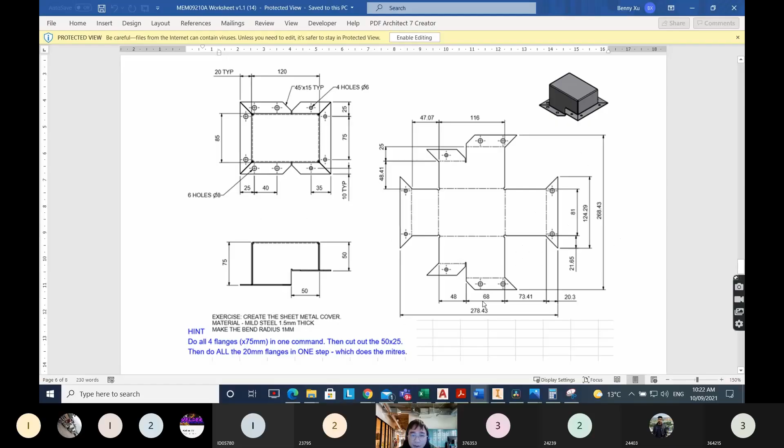Sheetmetal number 2, that's much easier, but there's some cutout in there. Go fold, fold, and fold. Yeah, this one is 2 folds. The first one is a 20 mil, so this is 20, and this one is a 10.

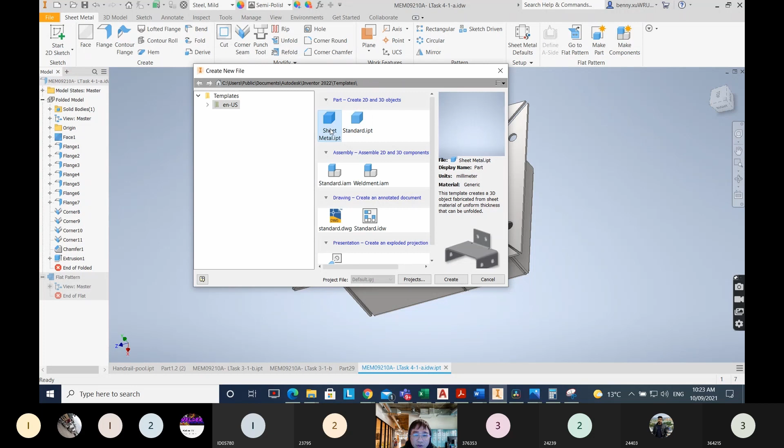The thickness is 1.5 aluminum. If I go to new, and then I go Sheetmetal and create. Remember, the first thing, change the default. Generic, I don't want it generic, I want it to be aluminum, 6061. Aluminum 6061. See that? And then this one, I just hit in the number 1.5 mil and save and close.

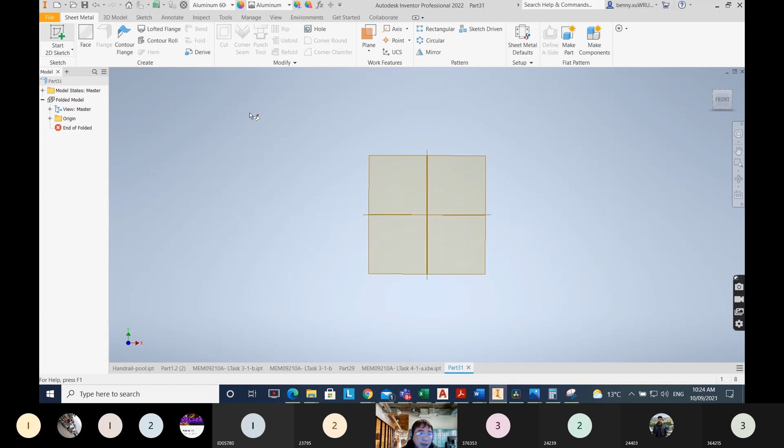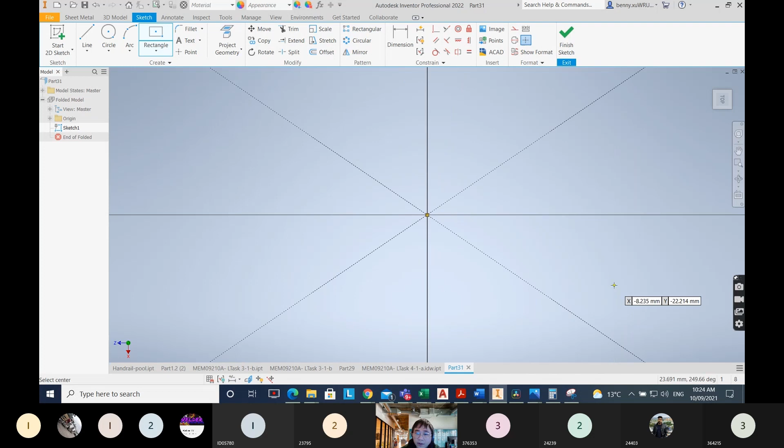Everything's been changed, and sketch. And again, I use this X and Z. Base size 300 and 200. If I go to the center, 200, tab 300. Okay, so that's the first one. I move it out a little bit.

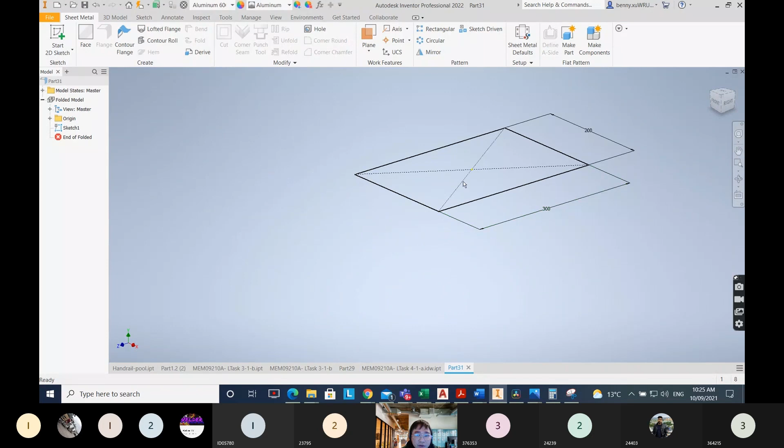I finish my base. I'm going to finish this, give a face, and then I fold this 1, 2, 3, 4 parts. And I'm taking on finish, zoom out a little bit, and give a face. Click on OK, because everything's set in defaults. Already changed that.

And say OK. So that's aluminum 6061. Okay, now I need to fold the parts. Doesn't matter which one you fold first. I would like to fold the longer side first. And I go back to here.

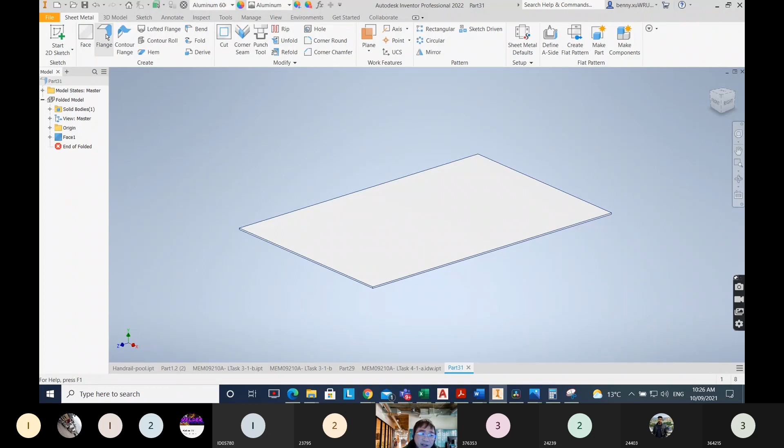I want to see what's in here. This one there is 300. I don't need to worry because I'm folding this one. All I need to worry is how much in here, 200. And here is 125. I want to fold 125 flange. 125, and I fold, and I selected this one too. So we can fold all together and apply. Finish this 4 folding.

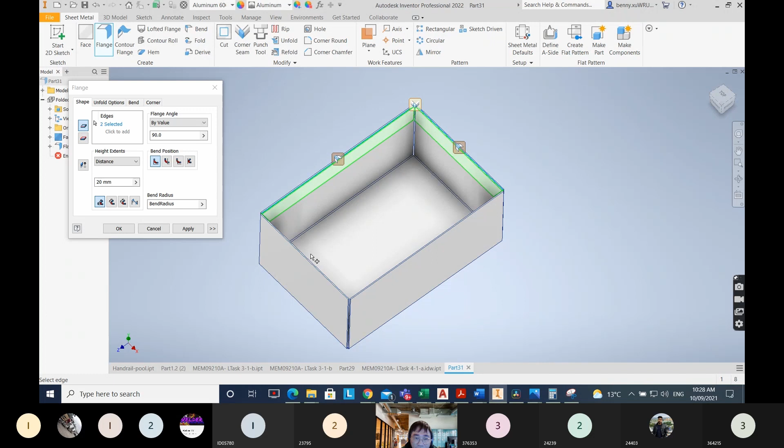Now I want to fold this one now. And this one there is 20 mil. We change this one to 20. And then we select the corner. We're just folding through. One, see when you fold, they automatically make an adjustment for you. That's the second fold. That's 20 mil fold. And then you need to fold another 10 mil.

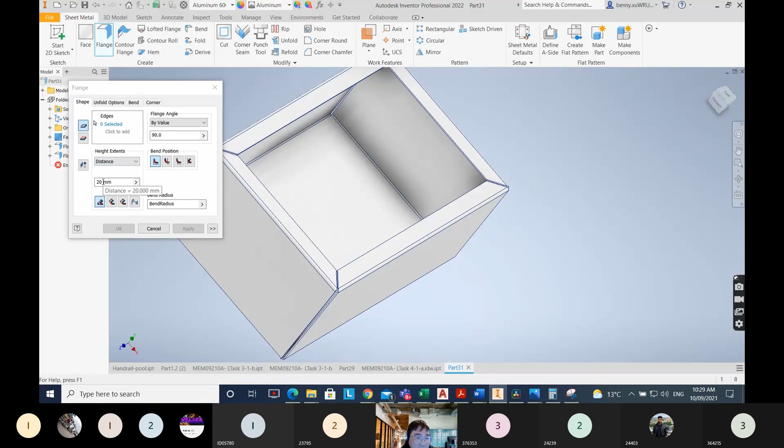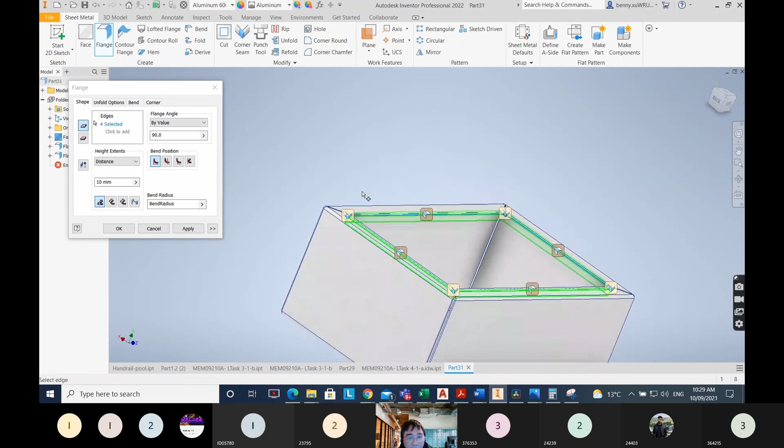And I put 10 mil. Select the edge and I fold it in. And then I put there, and I put there. The last one. Okay, all folded in. That's what we need to do. I'm happy with these results. Next step, the box is finished.

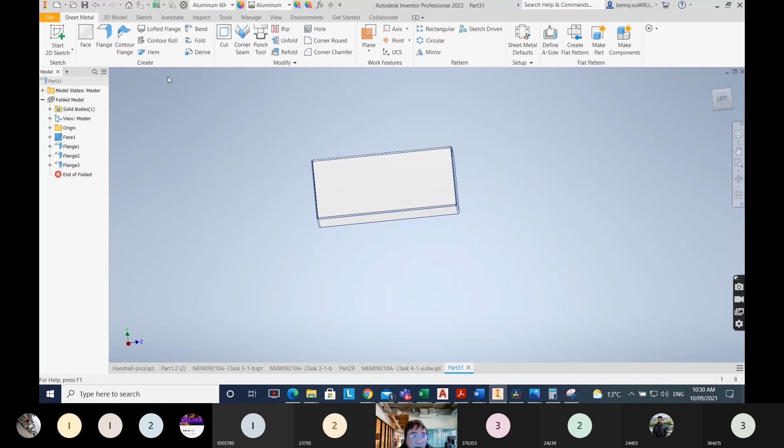Because this box is a control box, we need to have a cooling system. Cooling system is cut out. You cut it from this side and you cut it from the back. Got the 3D model, I got this face, and I say, okay, 50 mil from this side and 50 mil from the bottom inside here. Cutting here 50 mil and here 50 mil.

This drawing face, we need to allocate it. Where is it? From the top is 80 mil. Let's say this is the top. From the top here is 80 mil. I'm going to start to draw 80 mil.

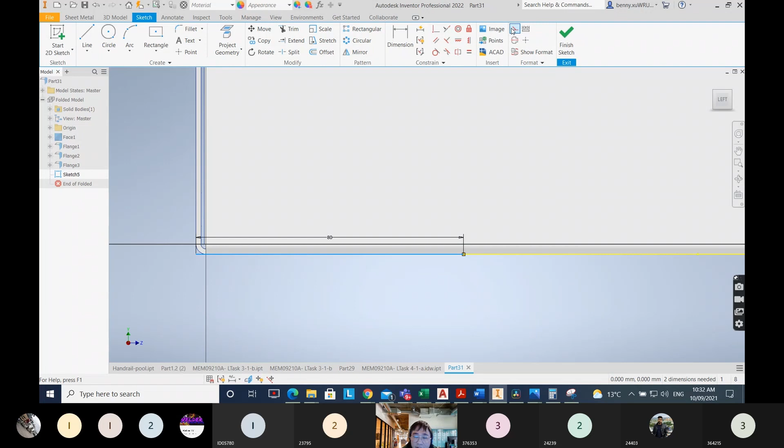From there. And to be good, I can draw from here because I need to cut off from there. I'll locate it and I say 80 mil. And I say okay. Okay, this one, construction line, minimize the confusion. We need to draw the first one. The first one, the 80 mil, you start from here. 8 mil by 100 mil, 8 by 100.

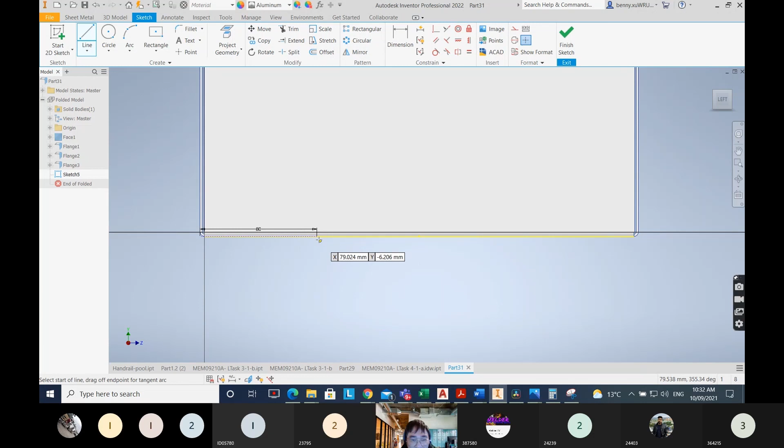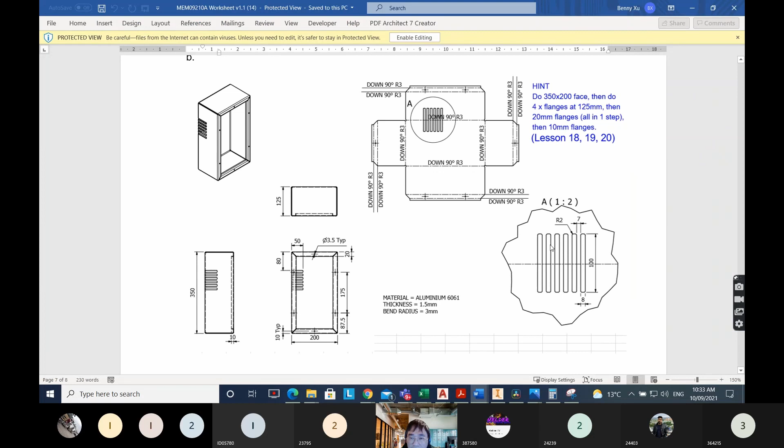We need to apply this for many of these. So I'm going to see 7 mil in between. And I put 7 and enter. And okay.

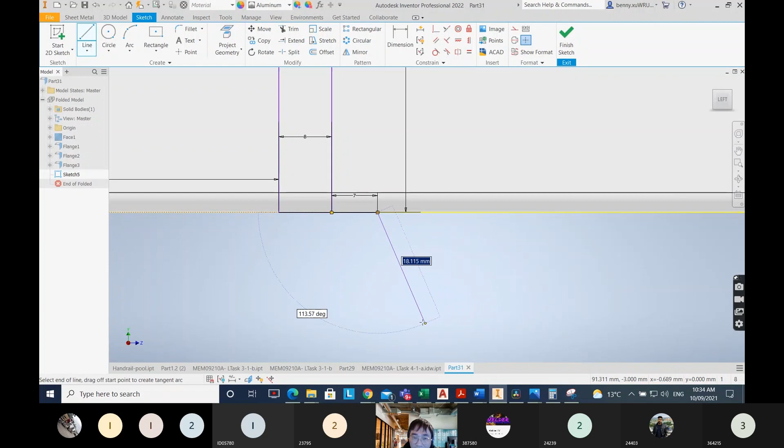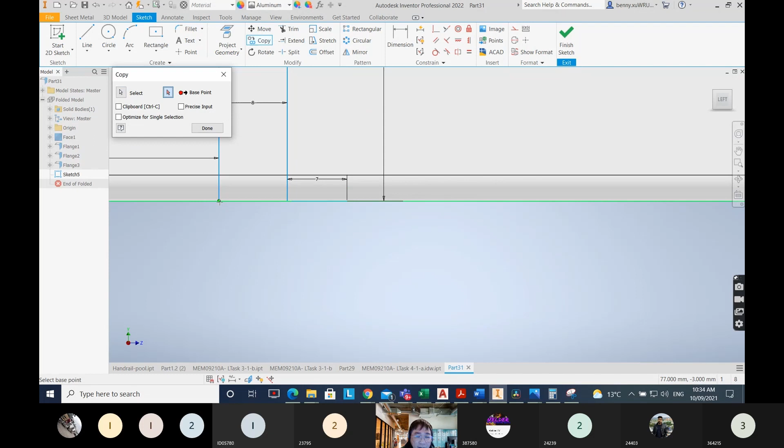Copy. I really want to copy the whole thing from there. So I need to go a little bit closer and select all of the components around. And I need this one too. I select the 7 mil as well. My base point should be here. And where do I want to copy to? The end of 7 mil.

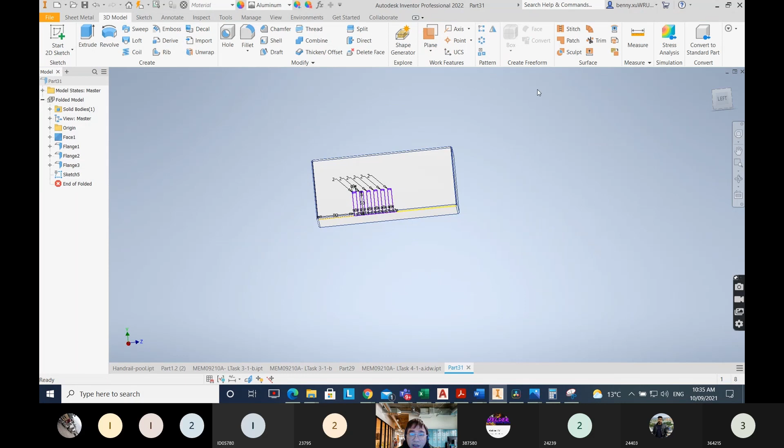3. At the moment, 1, 2, 3, 4, 5, and 6. Done. I just click on OK. I finish the sketch. Extrude. I want to cut all these. Select the profile. 1, 2, 3, 4, 5, 6. Cut.

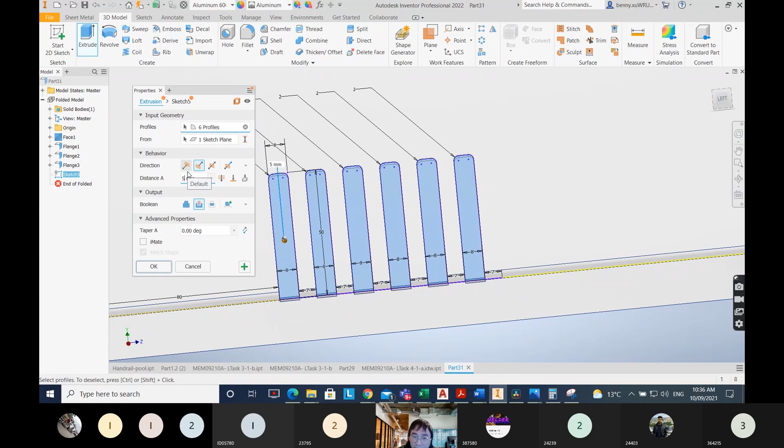Remember, it's not 10 mil, it's 50 mil. I click on OK. You can see it, that's 50 mil, that's 50 mil. So total we got 100 mil. If I go a little bit further out, you can see it straight away.

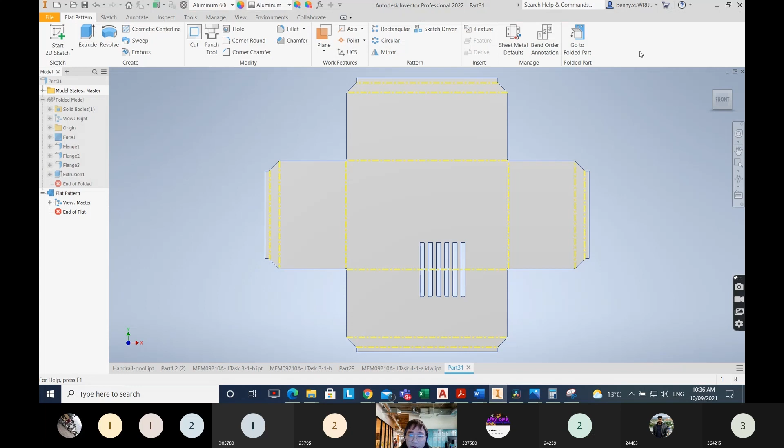Create a flat pattern. See what happened, everything as the instruction. So I'm happy with these results. So I save as. Okay, so that's finished. Thank you for watching.